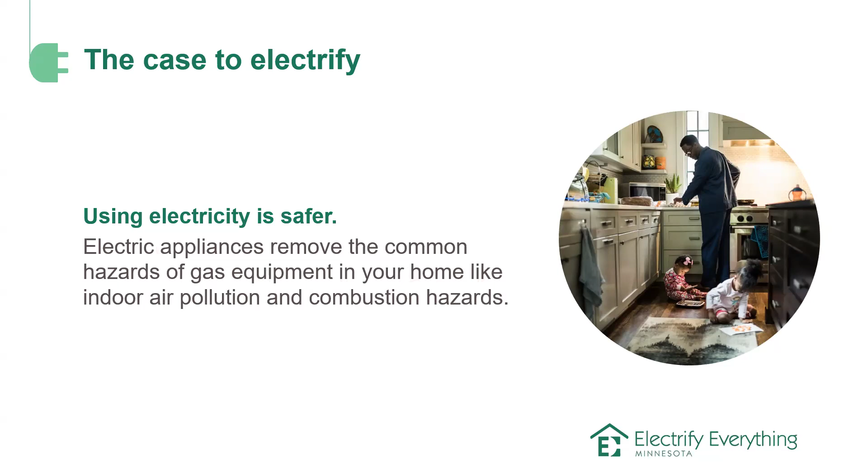Another reason is that electricity rates are more stable. Electricity rates historically grow at an incremental pace, while fossil fuel prices have had much more fluctuation historically. And that's one of the reasons - electricity prices are regulated by the State Public Utilities Commission.

And so they have to approve increases in electricity rates, and that kind of mitigates the increase in those prices, whereas fossil fuels, natural gas prices, are based on supply and demand and global markets, and sometimes events that send their prices skyrocketing and falling up and down.

So electricity rates are generally more stable.

Electrifying our home also makes a difference for the health of people, but also the planet. Climate change and negative environmental outcomes from human activity - that's a big problem, but our actions are small, though they do matter. We can all take part in contributing positively to helping the climate by transitioning our home away from gas equipment to electric equipment, taking those small but necessary steps to do so.

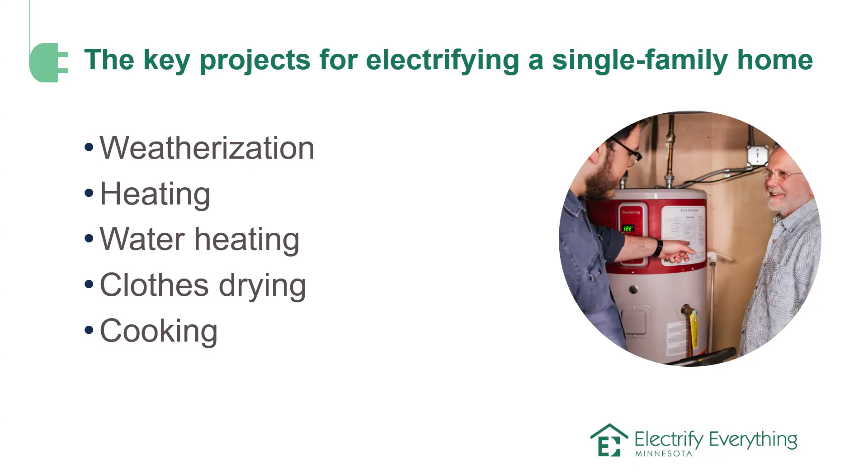So some of the key projects for electrifying a single family home - I mentioned a lot of these on our agenda - are weatherization, home heating and cooling as well. We'll talk about why heating is one of the big fish. Water heating as well, clothes drying, and finally we'll talk about cooking as one of those projects.

And I will pass it off to Matthew to talk about weatherization. Thank you, Sean. Next slide here.

So when we're talking about electrification, why are we talking about weatherization? Well, the big reason is that in the average home in Minnesota, 72% of all the energy used in that home goes towards heating. So taking all of the energy used from the year, about 70% goes towards heating. That's because we have really cold winters here, and it takes a lot of energy to heat our homes. So compared to the rest of the country, heating is an even bigger piece of the puzzle.

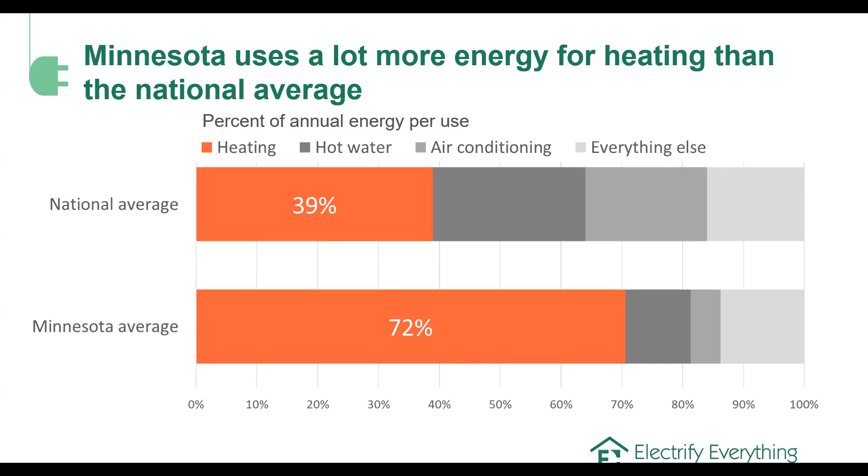So when we're talking about how to save energy and boost sustainability in our homes, there are two main questions: one is how much heat do our homes need, and how are we providing that heat? Weatherization answers that first question.

So what is weatherization? Weatherization refers to treating the parts of the home that keep the outdoor air outside and keep the conditioned indoor air inside. That includes insulation in the walls and the attic, air sealing all of the air leaks, and addressing windows. Weatherization is really important for electrification because it makes it easier and more effective, and I'll explain why.

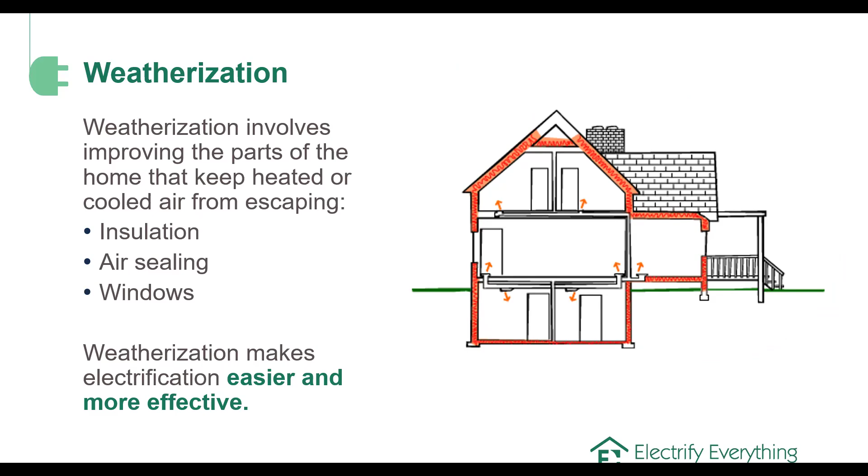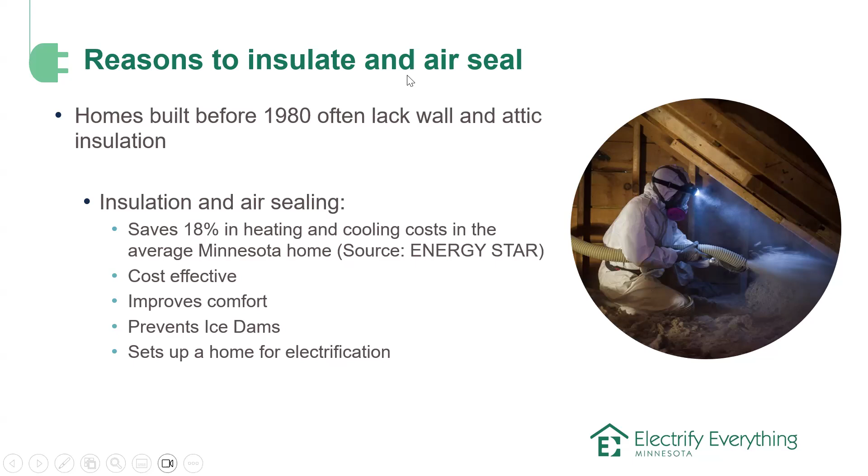Reasons to insulate and air seal are that homes built before 1980 often lack wall and attic insulation. If your camera is on, just put your hand up if your home was built before 1980 - it's most of the homes in Minnesota, so probably a lot of us here, especially if you're from Minneapolis. So it's likely that your home may be lacking insulation, and if it is, that is a huge opportunity.

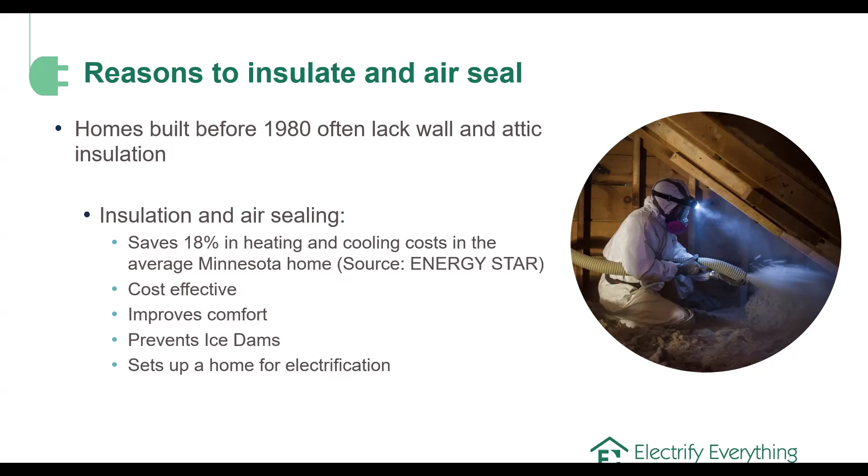By insulating and air sealing, you can save on average 18% of your heating and cooling costs. It's also a very cost-effective upgrade because of those energy savings you'll see on your bill - they will pay for the cost of the project over time. Insulation also improves comfort; we've all been in cold, drafty rooms and homes, and what if we were cozy all winter long? Insulation and air sealing can also prevent ice dams from forming, and it sets up a home for electrification.

I think a lot of people are familiar with insulation - it's the fluffy stuff in the attic and the walls. But what is air sealing? Air sealing refers to sealing up all of the little cracks and gaps in your building's envelope to make sure heat is not escaping. That looks like sealing around light fixtures in the ceiling, your attic hatch, where a bathroom fan exits the home, chimneys, etc., and also in the basement and windows and like where your dryer vent exits.

All of those areas are areas where the heat in your home can escape. In an old, un-air-sealed home, that adds up to having about a 2 by 2 foot hole in your house - that's like having a window open all winter long. So air sealing is a really important step towards improving your home's efficiency.

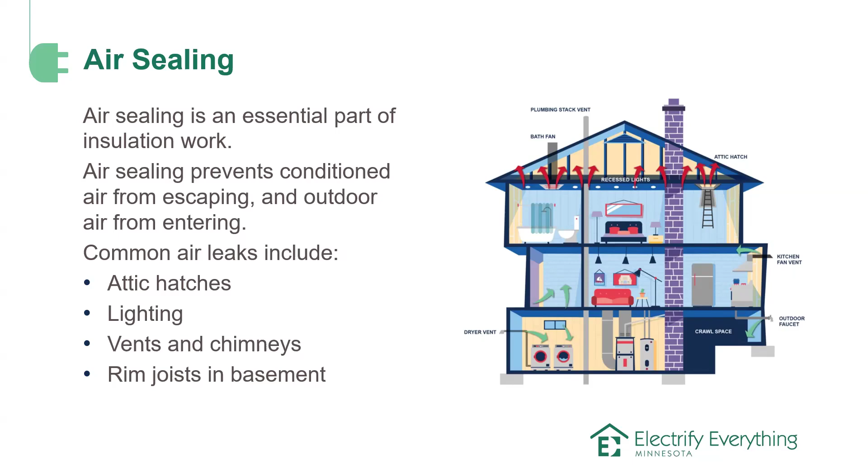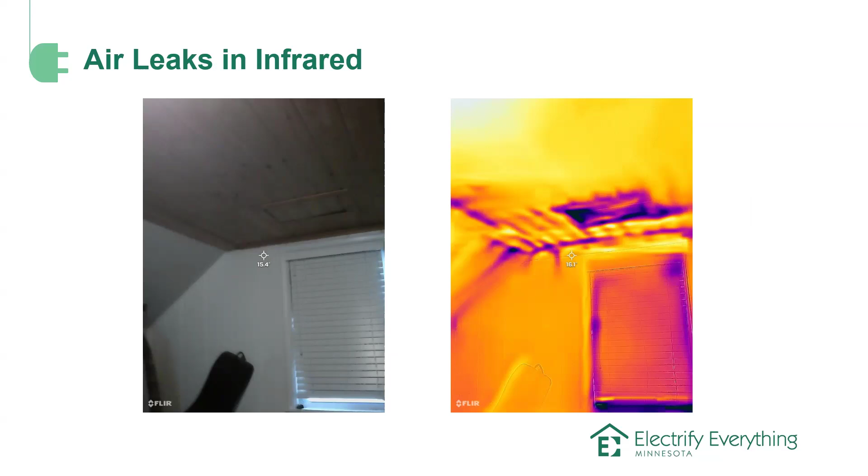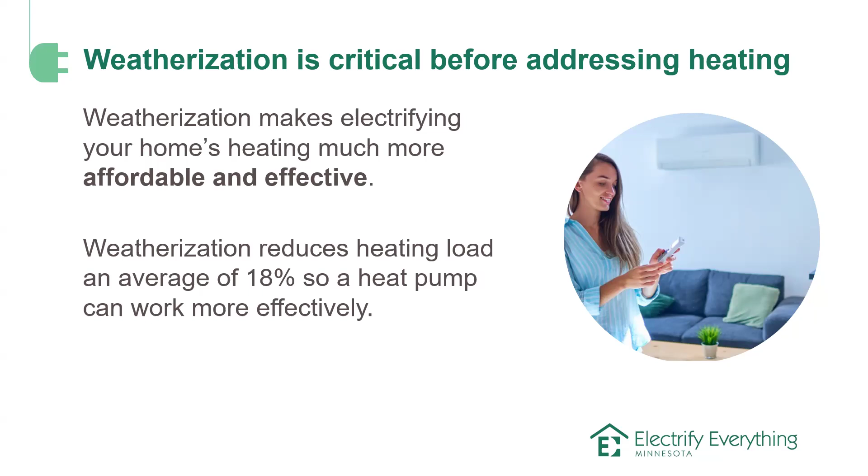I've been saying weatherization is important for electrification, but why is that? The big reason is that in order to electrify your space heating, it's important to first reduce how much energy your home needs to stay warm. Weatherization reduces the heating load of a house on average 18%, and that means a heat pump can work much more effectively to heat your home because it needs to put less heat energy into your house.

Until December 31st of this year, the federal 25C tax credit is still in place, up to $1,200. So if you're thinking about making an upgrade, now is a great time because that tax credit is going away at the end of the year. And then for low income and income qualified homes, next year there are expected to be federal rebates administered by the state, but those will be spread statewide, so availability may be limited.

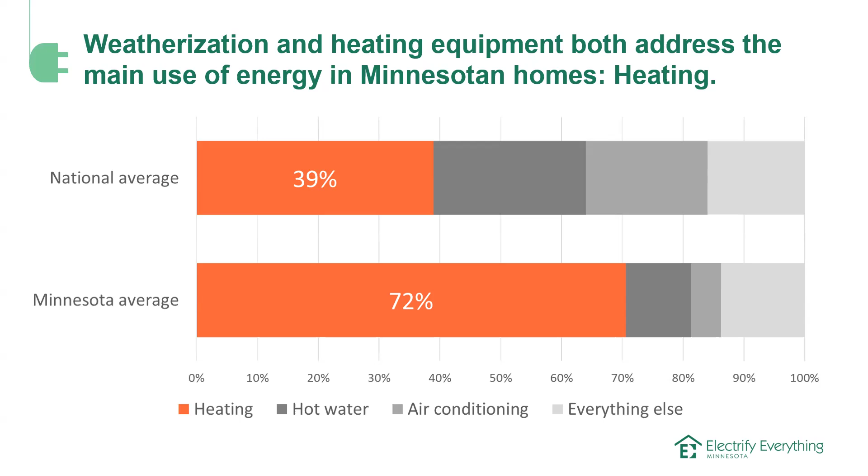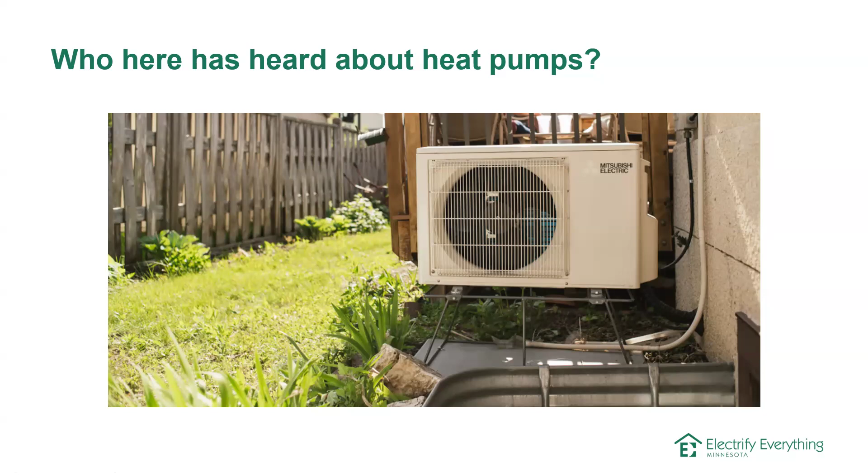So you can raise your hand or react. Who here has heard about heat pumps? I know some of you were interested in heat pumps on the registration form, so I know quite a few of you have. Heat pumps are getting increasingly more common in Minnesota, and more people are hearing about them and talking about them. But it would not be uncommon even just a few years ago that very few people had heard about them before. So what are heat pumps? Maybe you've seen these before outside someone's house, but what are they? What do they do?

Well, a heat pump is like a two-way air conditioner. It moves heat through refrigerant, either from inside your house to outside, like probably if you have a heat pump this week, it's been doing that. Or over the summer during the cooling season, it basically uses refrigerant to transfer heat outside and cools the air inside your home. But in the winter, which is coming up on us quickly, it will transfer heat from outside to the inside of your home to heat, even when it's very cold.

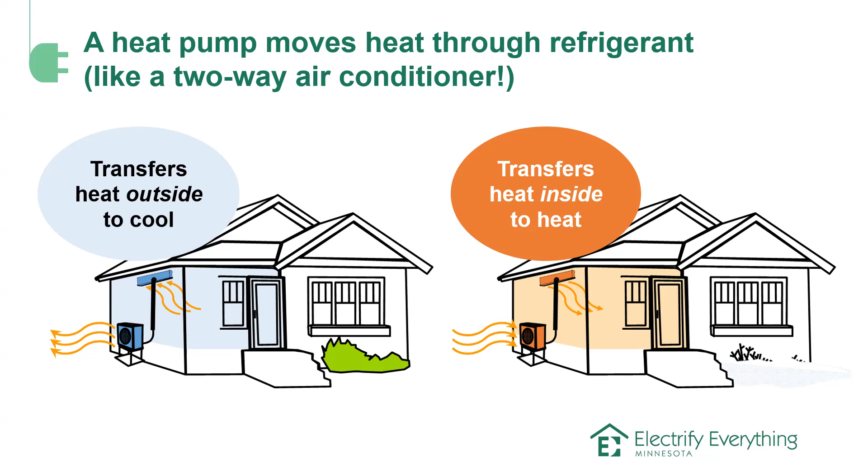Heat pumps have their limits, and we'll talk about those. But even when it's quite cold outside, there's still heat in the air to take and to warm your house with. So your heat pump will be working hard to make sure that you stay toasty by using refrigerant.

One of the big benefits about heat pumps is that they're flexible. So we have what we call ducted and ductless systems.

Ducted, or central, systems commonly incorporate into your central AC and central heating. They have this outdoor unit which looks like a cube, very similar to an air conditioner, although you'll notice it sits off the ground. That's so it can work when there's snow in the winter, so it's not churning in snow or snow blocking it.

It will sit up higher than a traditional AC, but it often replaces your central AC. It uses that outdoor unit to move heat to or from the house through refrigerant lines, to an indoor unit that sits above the furnace, very similar to a central AC. So if you have one of these systems, you may not really notice much of a difference.

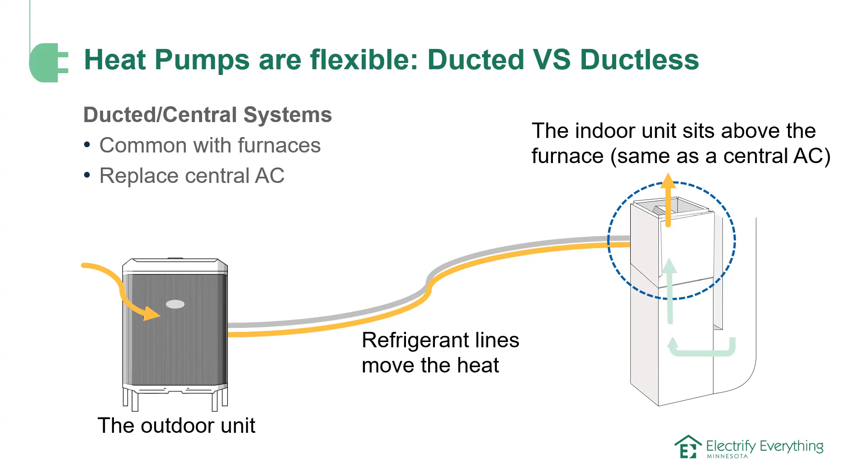However, the ductless systems, or mini split systems, look quite different, and you've probably seen them before. These are very common with boilers or electric baseboard heat because they don't use a duct system.

They're ductless, and these are great for homes without central AC but you still want cooling—maybe you're using window units or there's no AC in the home. Those outdoor units are like what we saw in the photo when I asked who'd heard about heat pumps—they kind of look like a big suitcase, and sometimes if it's a big system, they'll look like two suitcases on top of each other. But again, you'll see that stand, sitting up higher than the snow line.

They use refrigerant lines to move heat in or outside of the house, and those indoor units, commonly called heads or cassettes, sit in rooms or areas within the home, whichever you want to heat or cool. You may have more than one inside your home, or some people have them just in one area that isn't well heated or cooled.

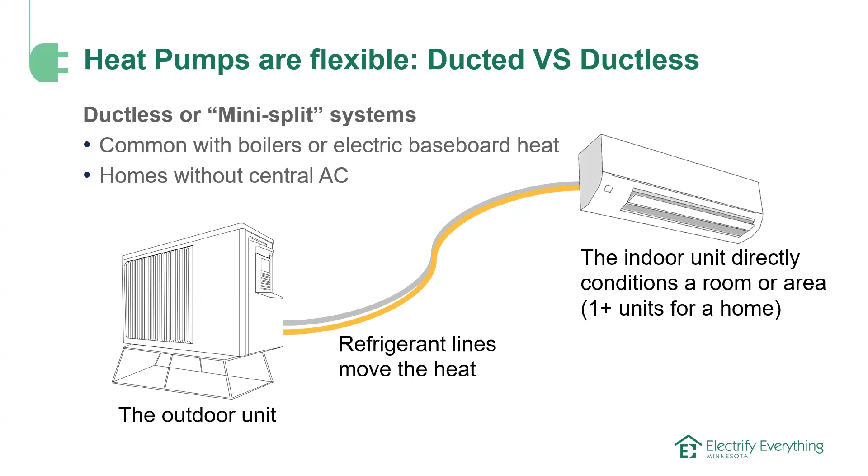That's what they look like on the inside, and yeah, they're commonly used with boilers or electric baseboard heat.

I alluded to this earlier, but heat pumps are most efficient in hot to cool weather. When the temperature gets colder, this lowers the heat pump's efficiency.

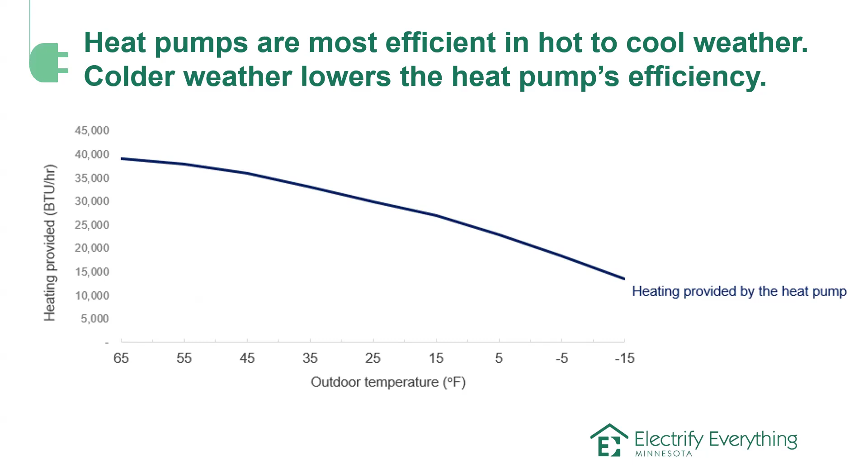But the good news is that much of the time we need heat is for mild to moderately cold weather. We tend to think of Minnesota weather as perpetually negative or 0 degrees, even negative 30 degrees, weeks on end of brutal cold. But actually, about 80% of our heating season is above 20 degrees, and the remaining 20% is when it's below 20 degrees. So it sticks out in our mind, but the reality is 80% is above 20 degrees.

A heat pump can work quite well in those temperatures and can still heat—most of them can heat your home or a building when it's above 20 degrees. So you can have a heat pump working for 80% of the cold season.

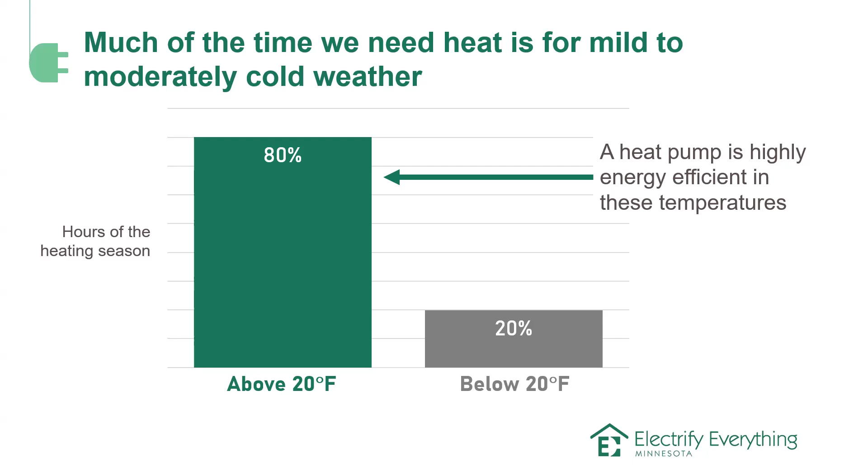A heat pump can either partially or fully electrify your heating needs, and that depends on another type of system, or two types of systems. So we talked about ducted and ductless systems. We also have hybrid and all electric systems.

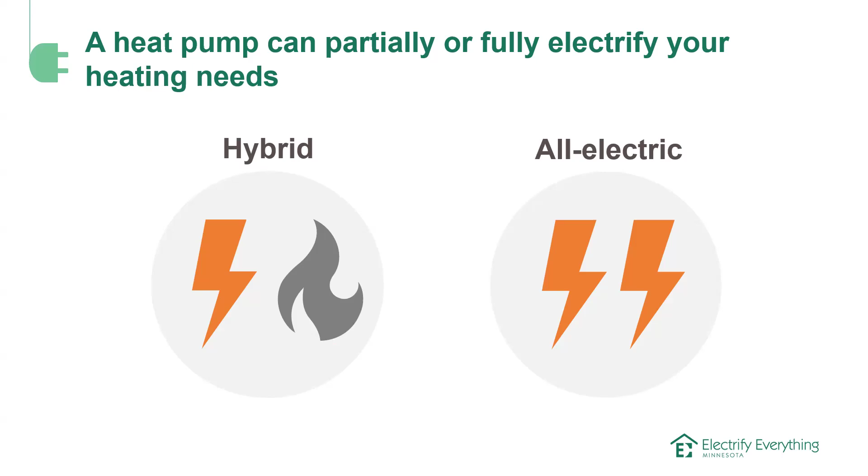A hybrid system is a heat pump that is paired with a fossil fuel system, so a furnace or a boiler, for example. And so, one of the benefits of these hybrid systems is that they can keep energy bills neutral or lower. And they also significantly reduce household carbon emissions. So we showed that graph, the 80-20%. If your furnace were running for that 80% of the time, that would be natural gas use for 80% of the time, whereas you're replacing that 80% with a heat pump and 20% for the furnace. So that's a significant reduction.

One of the drawbacks, though, is that the setup can be complicated depending on your existing equipment. So sometimes, depending on the furnace or the boiler system you have, it can be difficult to make those compatible or to have integrated controls. And so that can be a challenge to coordinate that and make that function effectively with a hybrid system.

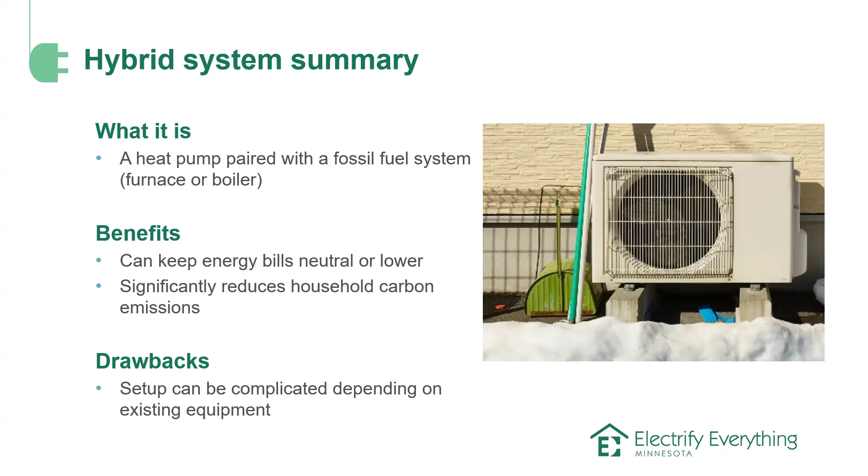The heating and cooling with a hybrid system. So this is what it would look like throughout the year. So during the summer, which kind of feels like we're still in summer, I think we're almost technically in fall, but the heat pump cools. And then when fall hits and temperatures drop, the heat pump can heat for you during those mildly cold temperatures.

When winter or the depths of winter hit, your furnace or your boiler will do the work for you below a certain temperature. And it depends on what system you have and how efficient it is. It may be 25 degrees, 30 degrees. Some of these systems can go down quite low, in fact, to negative temperatures. But you do need a backup system, whether that's a furnace or a boiler or an electric system. And then when spring comes around, the heat pump can do your heating again.

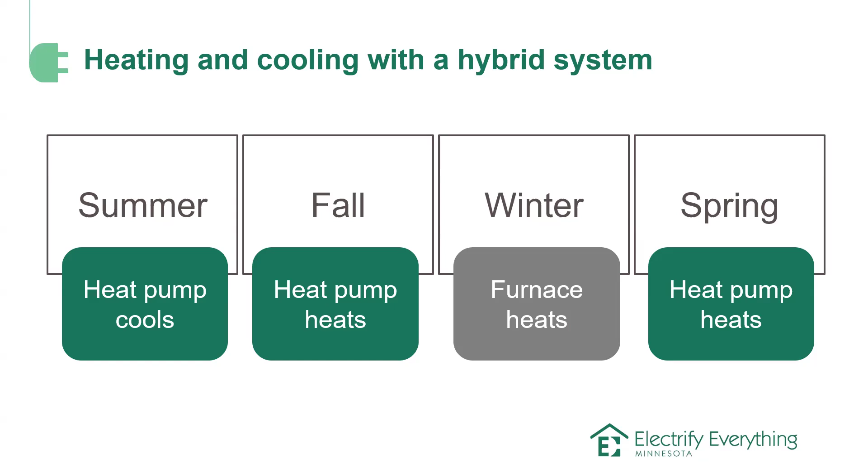All electric system. So what is an all electric system? Well, this is a heat pump that is paired with what's called an electric plenum. And the plenum is just an electric resistance heating element that sits inside. You can see this furnace inside someone's home. It's just a resistance element that heats your home. It's basically a large electric resistance element that sits above your electric furnace.

So the benefits of having an electric heat pump with an electric furnace is that it can be simpler to set up because it's all part of one electric system. And this is a good way to maximally reduce your household carbon emissions. So you're using electricity 100% of the time rather than, for example, 80% of the time. That's one of the big benefits.

And there are also some drawbacks in that winter heating bills are more expensive, because, I think I saw someone mention in the chat, yes, electricity is more expensive than natural gas. Generally is, and historically has been. So if you're heating with electricity, you almost certainly pay more than someone with natural gas, although you probably pay less than someone with propane. But winter heating bills can be more expensive.

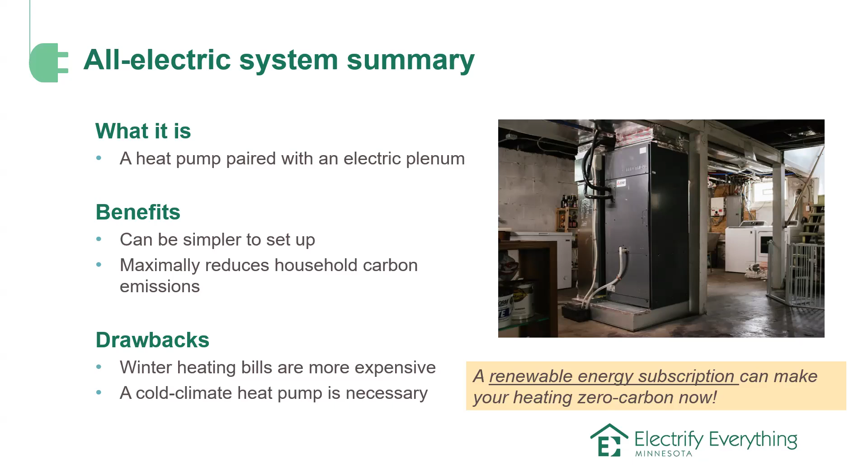Although I will also mention Xcel Energy has a new space heating rate for people with primary heating systems that are electric that is making that maybe not so much the case anymore, or it's more cost competitive. But we can talk about that later. A cold climate heat pump is also necessary, which is a high efficiency heat pump which also tends to be more expensive. So it's a higher upfront cost for such a system.

And the heating and cooling with an all-electric system looks very similar. In the summer, we're cooling with the heat pump. The fall, we're heating with the heat pump. In the winter, you have a heat pump, but also you have that electric secondary heat for when those temperatures dip. And then again in spring, the heat pump springs into action and does your heating.

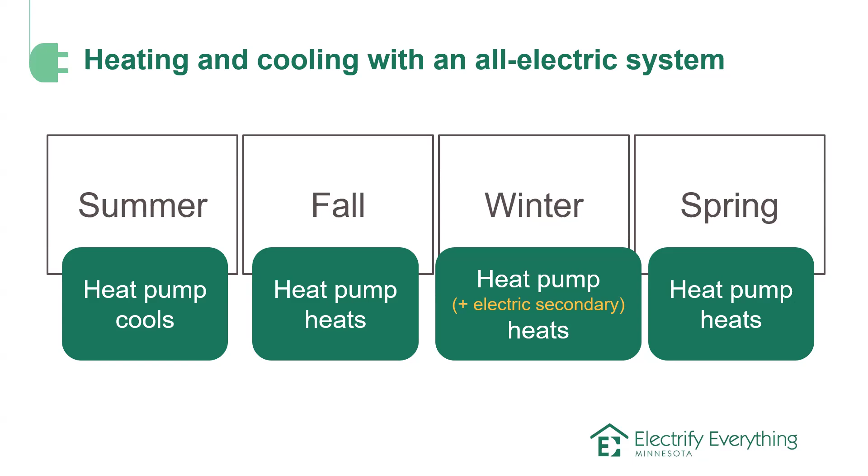Heat pump incentives, the typical upfront cost for a system, depending on the size, depending on the efficiency. I've had people ask like, well, what's a rough estimate? And I'm like, well, I can give you a $12,000 range, but a lot of people want something more precise. So the answer is that it really depends. But the rebates are available. They are varied. Some of them are disappearing, but also I'll point to the Xcel and CenterPoint Energy rebate, and that is a rebate from both Xcel and CenterPoint that adds up to $2,000.

And then again, that federal tax credit that's going away at the end of the year is up to $2,000. Federal rebates expected in 2026 up to $8,000, and those are depending on income, but those funds are limited and they may go quickly. So it sounds very nice, but approach that with caution.

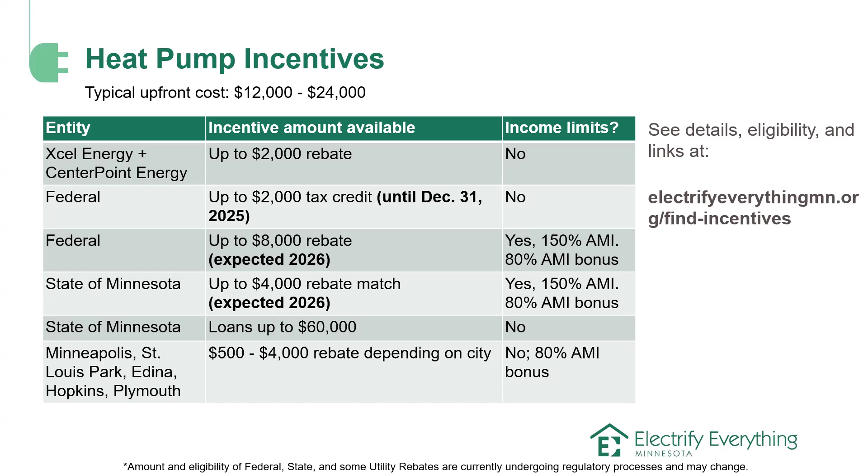All right, Matthew, I think this is where you take over and talk about some of our other appliances we want to electrify. Yeah, yeah.

Thanks, John. So, heating, like I showed earlier, is about 70% of home energy use. But water heating is the next biggest category and also the next biggest gas user in a home. And then cooking and clothes drying are the other biggest energy users typically. Next slide.

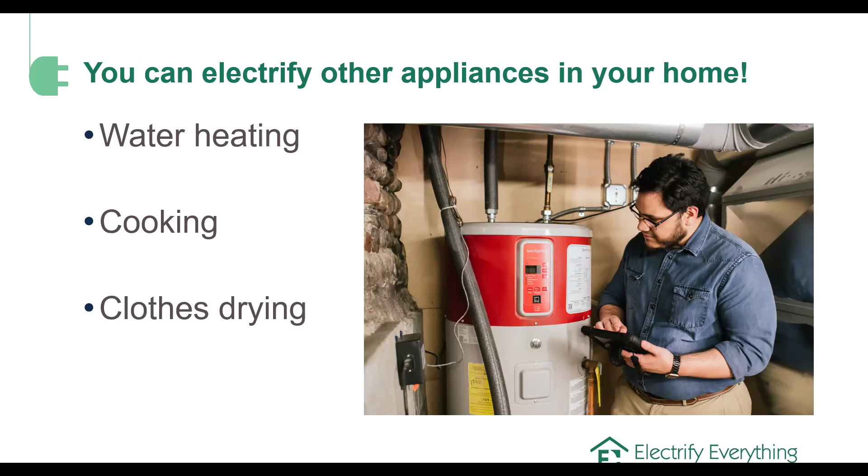So, water heating. How do we heat our water? How do we take those hot showers? So, a heat pump water heater, also known as a hybrid water heater, is a tank water heating system that uses a heat pump to heat the water. These are really great pieces of equipment. If you haven't noticed already, we are really into heat pump technology because it is so energy efficient.

Heat pump water heaters are over 3 times more energy efficient than standard electric tanks. And they're safer than gas because they don't have any of the risk of combustion gases leaking into your home. Next slide.

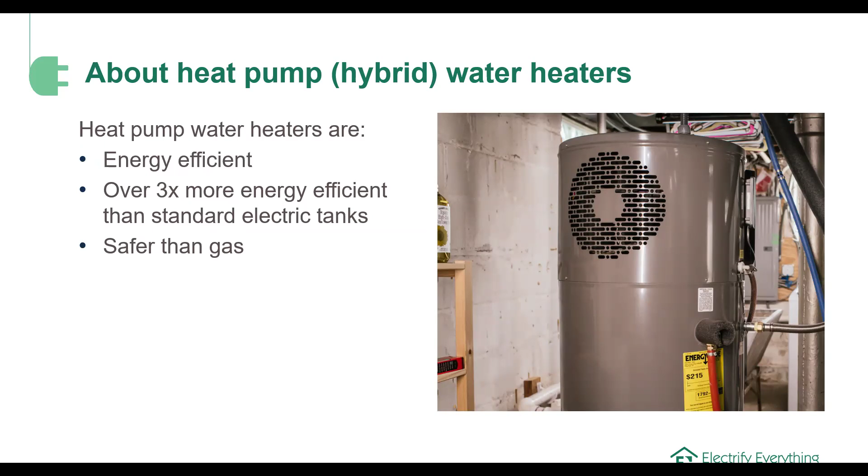Heat pump water heaters also have electric resistance rods inside of them that act as boosters to provide a little extra heat when there's higher demand. Next slide.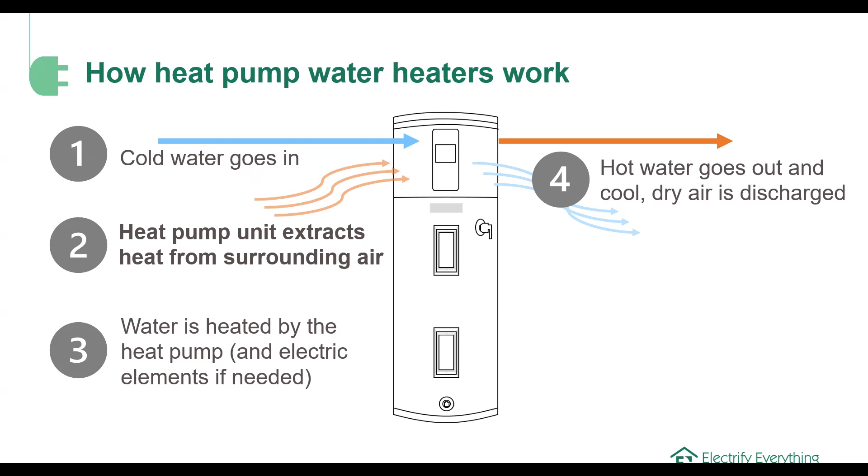So how much will it cost to heat your water with a heat pump water heater? Compared to a standard electric resistance water heater, a heat pump water heater can save you anywhere from $300 to $500 a year annually, which is a big deal. And it's because heat pump water heaters are so much more efficient than traditional electric resistance.

Compared to a standard gas water heater, with a heat pump water heater you can expect to break even on energy costs or save up to about $175 annually. That's just because the price of gas is different than the price of electricity. But you can expect to pay similar or save a little bit with a heat pump water heater. Next slide.

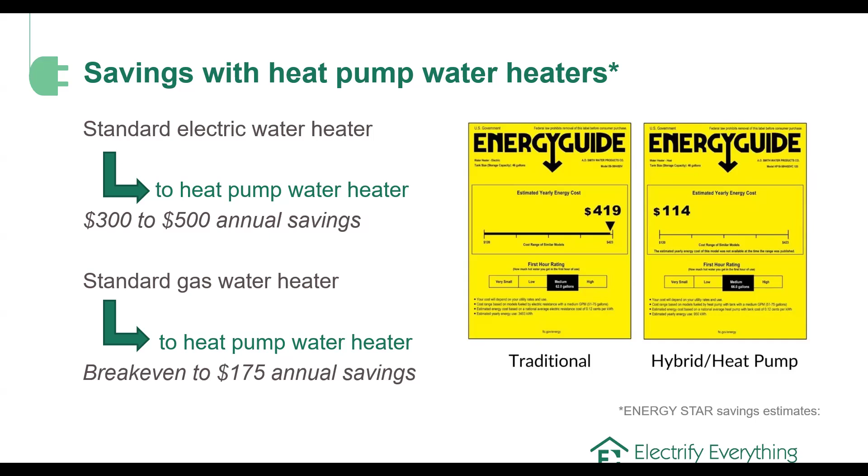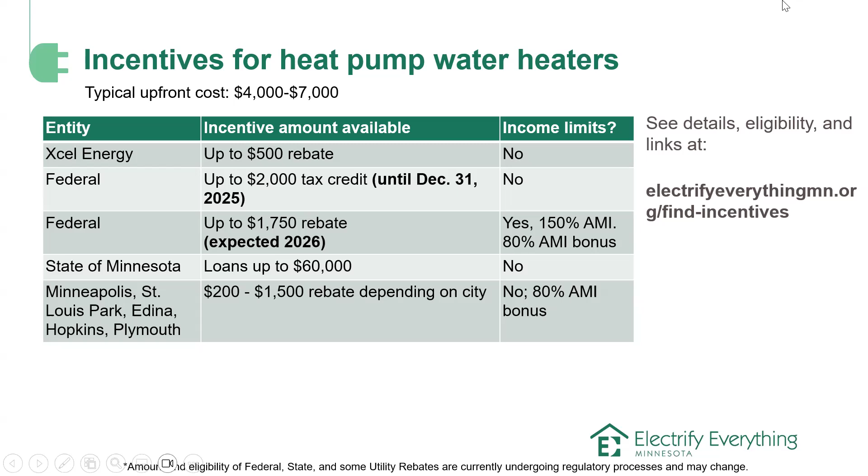So, there are some good incentives for heat pump water heaters as well. Typically, you can expect quotes between like $4,000 and $7,000 for a heat pump water heater. But there are a number of incentives. The Xcel Energy rebate, the 25C tax credit that's expiring this year, and then those federal rebates and city rebates that Sean mentioned. Next slide.

So water heating is really important thinking about the next biggest energy user in a home. But cooking is really important thinking about the appliance that is in the space where you gather the most, the kitchen. Next slide.

So induction ranges or induction stoves are a type of electric stove that transfer energy directly into the pan sitting on the stove through a magnetic field. Because of this, they boil water very quickly. They can boil 1 quart of water in about 2 minutes. And the gas stoves and traditional electric stoves take about 6 to 10 minutes. So they're super fast. They also cool down super fast as well. So for cooking, they're really responsive, just like a gas stove.

So a lot of people who really enjoy cooking and want a lot of control in that process find that induction cooktops provide them a level of control similar to gas. Because they transfer heat directly into the pan, they don't overheat the cooktop, so can be safer for kids. And if you forget a spatula on the cooktop, you don't have to worry about it catching on fire or melting. They're also really easy to clean.

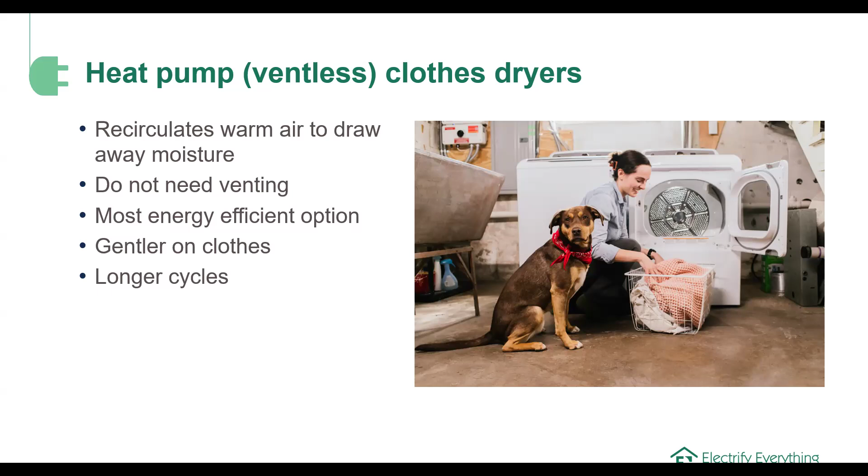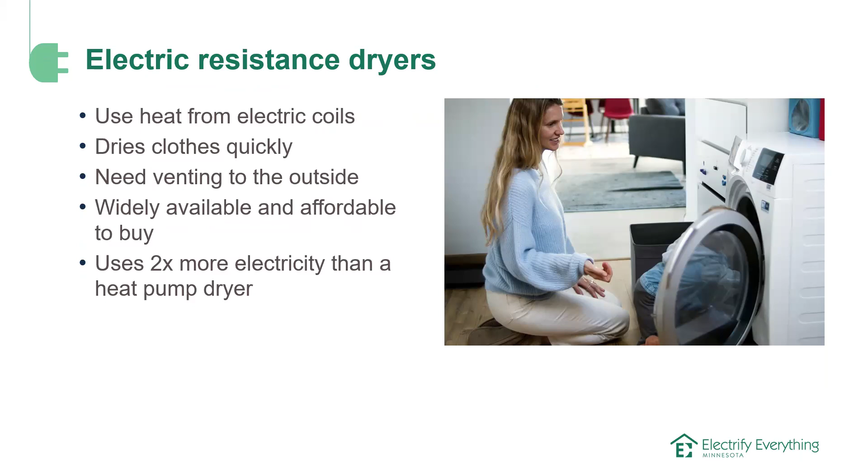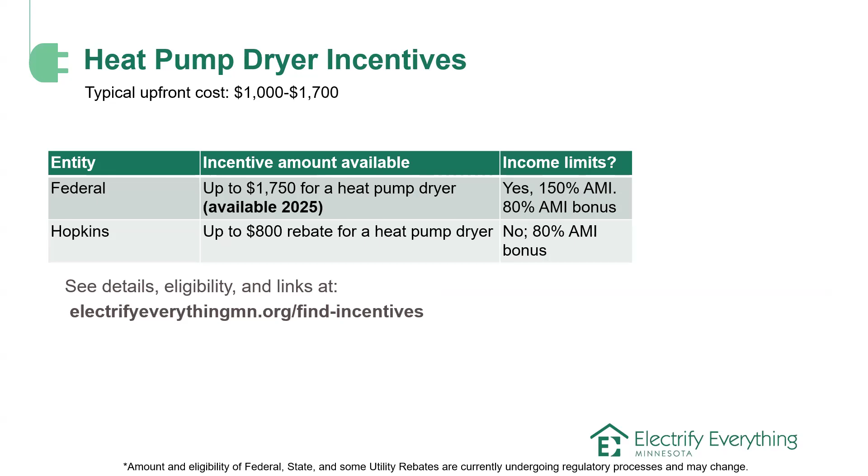Another good option for clothes drying specifically is a classic electric resistance dryer. They use electric heat from coils and they dry clothes quickly. They do need to be vented to the outside, but they're widely available and come at a really broad range of price points. They do use about twice as much electricity as a heat pump dryer. Next slide. And similar to stoves, there are fewer incentives for clothes dryers, but one from the city of Hopkins. Next slide.

So that covers the main areas of a home to upgrade to electrify: weatherization, your heating system, your water heater, your clothes dryer, and your stove. So now I'll pass it over to Sean to talk about how to get your home ready for electrification. Thank you, Matthew.

So a common upgrade is from a 100 amp to 200 amp service panel. Some older homes have maybe like a 60 amp panel. I know we have a lot of people from a couple different neighborhoods with some older homes, so it could be maybe around 100, maybe 150, but it's probably in that lower amperage range. So what we suggest is to consult an electrician regarding the needs for your home, and they will give you advice according to what you might need.

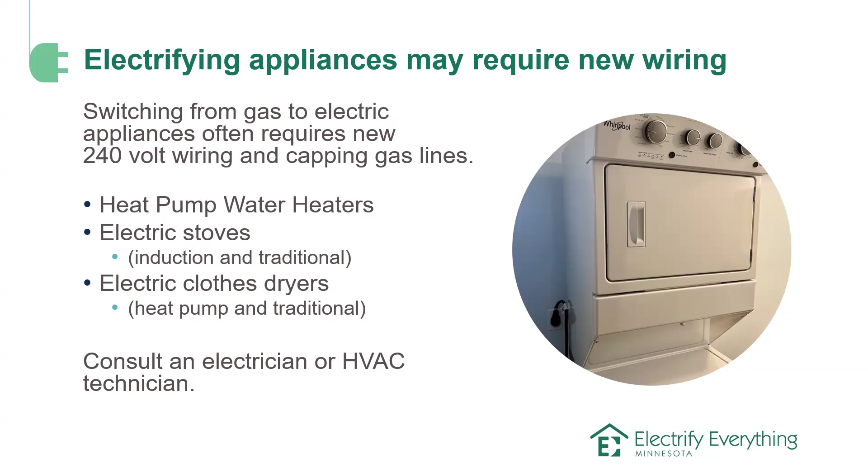Xcel offers up to $1,500, plus a tax credit of $600. The state of Minnesota is going to start with grants for $3,000 - we don't have a date available yet, but the Department of Commerce website would be the place to check. If you live in Hopkins or Plymouth, you get $500 to $2,000 for wiring. With the Inflation Reduction Act rebates, up to $2,500. Those funds will probably be limited, but there are some decent incentives available, so don't let cost be an obstacle.

So, resources - there are a lot of resources available, and with all this information you're probably thinking, okay, where do I start? This is a lot, I have these projects maybe in mind - who do I talk to figure out what to prioritize if one thing needs to be done before another?

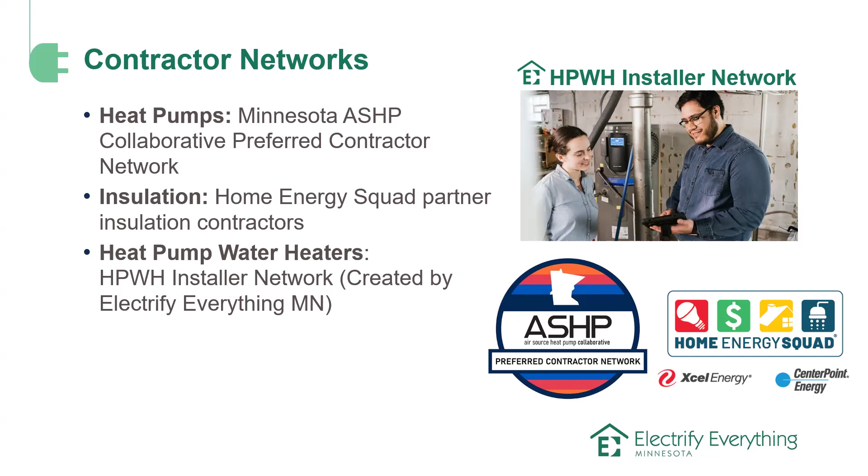Also, weatherization assistance. You saw that weatherization can be expensive, but if you are income qualified, you may qualify for free weatherization of your home.

So, summary of where to get started. If you haven't had one yet, I would suggest that you schedule a home energy squad visit to learn more about your home, the things that are going well, and the things that could help you save energy, save money, and projects you could eye to tackle. And if you've had the home energy squad visit and want to know which projects to address first, which contractors are doing this kind of work, and which rebates you can stack and combine, I would talk to an Electrify Everything advisor—they are experts on this. Again, that's a cost-free and pressure-free service that is offered.